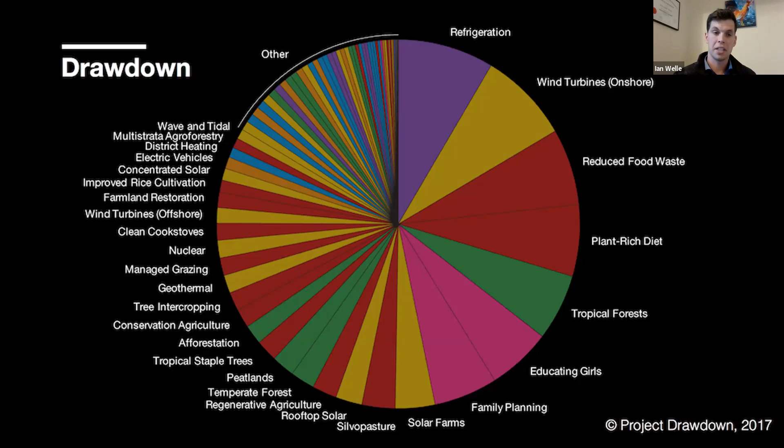So this is the single biggest thing that we can do to make a difference around the globe. It's bigger than nuclear, tropical forests, wind turbines, solar, for example. Things we talk about all the time that are having a huge effect on global warming. But the thing that we're using day in, day out to provide cooling to our curling clubs is actually one of the biggest culprits.

And so why is this though? This is a quick analysis that I put together to look at different types of refrigerants. Basically the culprit isn't actually doing heat recovery in your refrigeration systems. It's actually the chemicals that are inside your refrigeration systems. And ammonia is toxic, yes, but it actually has zero effect on the environment. So that's why a lot of people really like ammonia: it's the most energy efficient refrigerant and it's great for the environment as it has no negative effects on the environment.

But we have often used things that the industry in general calls freons, and when they're released into the environment, they have a huge negative effect. To put it in perspective, if you had a curling club full of R404A, and by a curling club full, I mean your refrigeration system in a curling club is probably around 200, maybe 300 pounds of refrigerant. If that gas escapes from your refrigeration system and is released into the atmosphere, it's equivalent to releasing 500 tons of CO2 into the atmosphere.

And to put that into perspective again, the entire natural gas emissions that a curling club produces in a year is probably around the 50-ton mark. So it's around maybe 8, maybe 9 curling clubs worth of fossil fuel emissions for the entire year. That just happens when you release that refrigerant into the atmosphere.

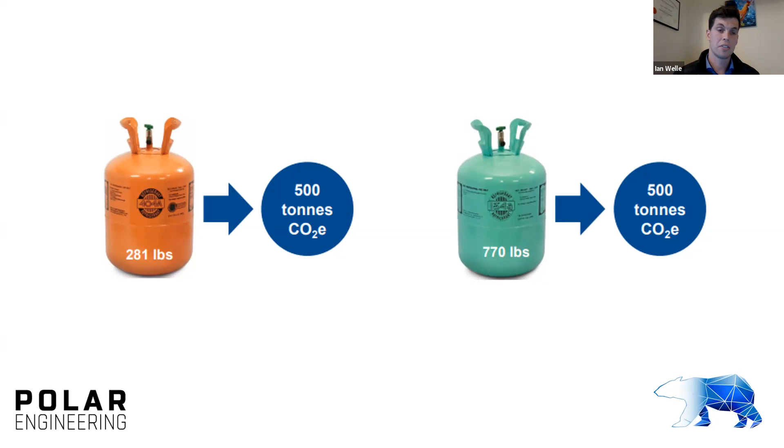And then if you look at another refrigerant, R134A, which is very commonly used in refrigeration systems that would come off the shelf from Trane or Carrier or those types of systems, if you release basically 2 curling clubs worth of refrigerant into the atmosphere, it's equivalent to releasing 500 tons of CO2. So it changes based on which type of refrigerant you use, but they all have a very large effect on the atmosphere. So what can we do about that as a world?

So what does that mean though for Canada? Because that's what affects you and me every day. So in Canada, we said that any refrigerant which has a global warming potential, also known as GWP, greater than 700, means that we will not be able to import that or produce it inside of Canada.

And so what that means for you is that if you're installing a refrigeration system today, it's really important to ask the contractor who's performing that work what refrigerant is going into the system and does it meet the new regulations. I don't expect you to remember all the facts and figures that I've been giving to you, but just to have that in the back of your mind that it's really important what refrigerant you pick, because after the year 2025, you will not be able to either import that or purchase that.

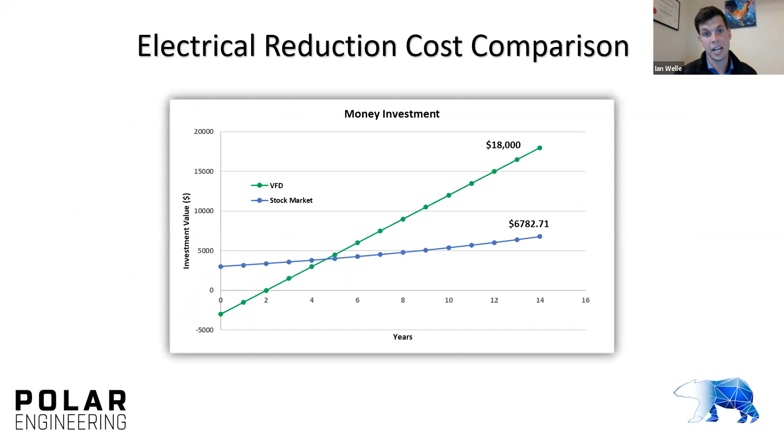So you pay for the project, and they will approve the project. So they'll guarantee you that they'll pay for that at the end of the project, but they want you to pay for it and then submit your tracking or bills that you work with either your contractor or your consulting firm. And then they'll reimburse you half of those costs about 2 to 3 months after you submit the bills. And that's true of the Clean BC grants and the VFD grants through BC Power Smart, that they don't pay for it up front, that they want you to offset the cost.

Oh, that's a really great piece of information for anyone to have with working on these projects. Obviously, we want to be able to access as many funds and help along the way as we can. So that's great. Okay, a few more have come in here.

On the energy savings front, I guess the question is, would you see some of these savings immediately, or some of these happening a year or 2 later? I know you touched on this a little bit throughout your presentation, but could you expand a little more if you're able to? Yeah, so where you see these savings is in your bills from BC Hydro and Fortis.

So basically, the second the VFD or the high temperature heat pump starts to operate is the second you stop using as much natural gas or electricity. So you wouldn't see the $1,500 savings for, this is the pumps, for example, VFD on the pumps. You wouldn't see that day one. You would see that accrued over a year, and every month your bill would be a few $100 less, sort of thing, if you incorporate it.

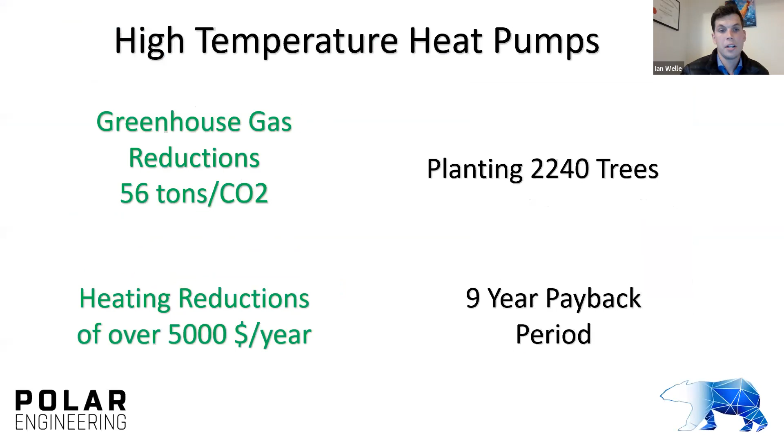The only risk or downside of installing a VFD is that if they fail, sometimes your brine pump will fail, and dirty power, or what we call brownouts, can sometimes hurt VFDs. But you can install them with what we call a bypass, which basically gets rid of that problem. Going back to the other question of why weren't they installed, they weren't installed because they cost more.

If you have two contractors bidding on your same job, one contractor could put VFDs on your system, but their number would look higher than the other contractor's. And so even though in the long run it makes sense, a lot of the time they weren't installed in the beginning, because they're a technology that's been on the market that cost a lot of money. They've dropped a lot in the last 5 years to become much more cost effective. So that's why they're getting installed now.

So I bet you if you built a new system now, it would get installed, but they were costly more than about 6 years ago. They were very expensive. And then on top of that, when contractors are bidding competitively for jobs, they're trying to remove as much cost as they possibly can. So this is a really simple way to reduce their cost, and it often ends up being an afterthought if you don't ask for it in the install. That's why they weren't installed. But they're generally really good options and good solutions to save you a lot of money.

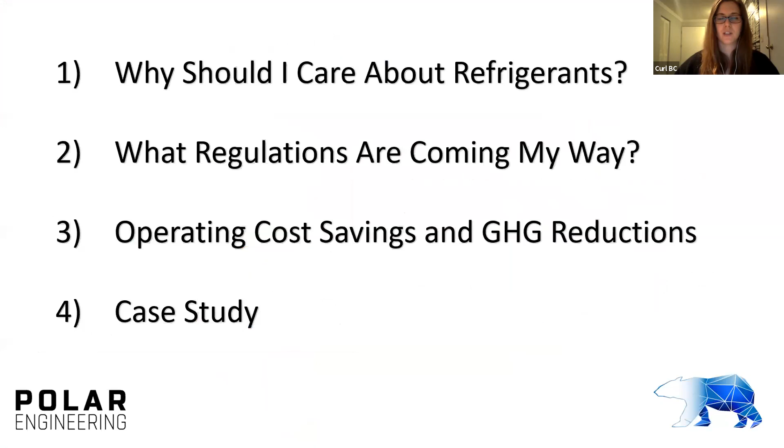Thank you for clarifying that. And it does highlight: ask the questions if you are in a process of bidding, of finding out what those numerical differences are and where they're coming from. Sounds like it's fairly important. Going to your manual a little bit more here, does your manual provide a framework for the costs to do the necessary work? So, in this year, task A would be between this amount of money spent. Does it go into that level?

I didn't detail that. If that was something that someone wanted me to look at, I could look at it for them if they wanted the manual updated. They're pretty normal tasks, so a lot of the time, I bet if you looked at your bills from contractors before, you could pull these things out, or you could talk to your contractor and say, this is the work I want you to complete this year. Can you please give me an estimate of how much it's going to cost? And they could help you with that. And it also depends on the expertise of the people operating your plants.

You'll notice there's certain jobs that we have identified work for the contractor to do that the arena owner could do themselves, but McKinsey decided that they would rather have the contractor do that work than the owner do it. And that was for safety reasons and the staff they had on site and just previous experience and really liking the contractor that they work with.

So there was lots of good reasons for making that choice, but I haven't broken that down in detail, and that's something that wouldn't be very difficult to do, but the scopes of work are clearly defined, so whoever you work with as a contractor could help you with that pretty easily. Awesome, thank you.

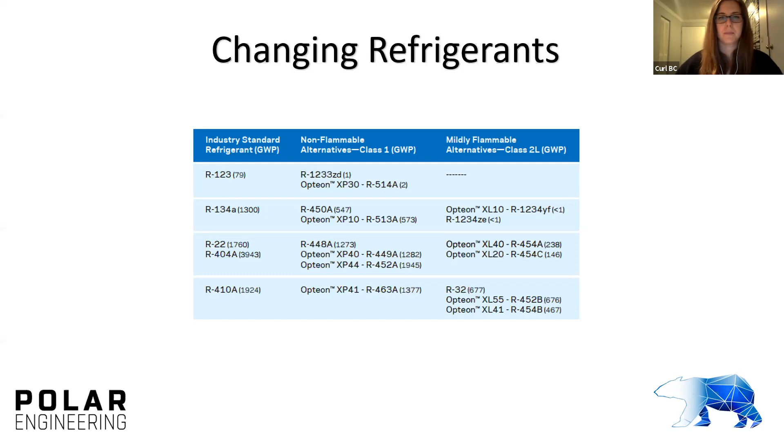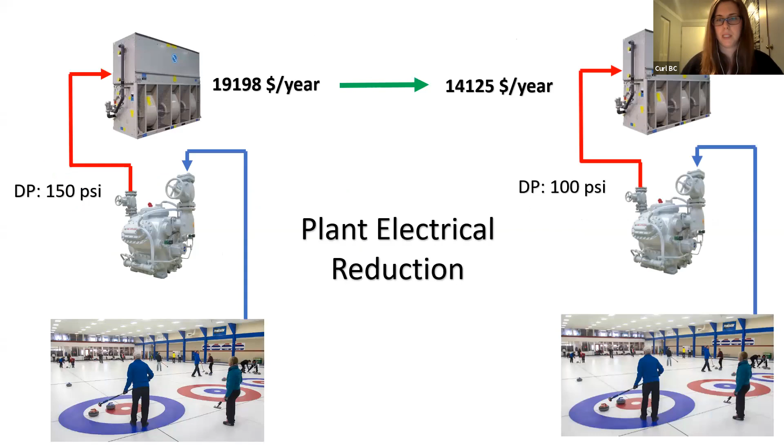Thank you for that. Going on the previous question that we answered about looking at the costs for task A, B, or C, we have a little more clarification. So if a board member is making these decisions at a club, how do they even know what is a reasonable cost for this mandatory work? And knowing which things are actually dictated by either the government or someone like Technical Safety BC or WorkSafe BC. Yeah. So you were talking about this manual again, right?

Basically, you can kind of think of it that you have to be a registered contractor to open a compressor, to change a valve. You can have ROs drain oils from systems if they're properly trained. This manual actually talks about what you can or can't do depending on your training level. That's one item in this document that outlines that in detail. And if you had more questions about that, I'd be happy to talk to it.

But it's also a conversation with your contractor, because if you're in a very remote community, you want to get everything done in maybe one or two visits a year, because it can be quite costly to get the contractor to come out and visit you. So what I would do is look at whether there are other facilities in your area that the contractor can visit at the same time to reduce their travel costs. But there isn't a specific thing in this manual that outlines the cost to perform that work.

But like I said, if that's something a board member wanted to get a better feel for, they could take it to the owner or a contractor they work with and say, can you please give me a price to perform the semi-annual maintenance? And is there anything in there you think I can do? They'll be happy to work with you on that, because like me, they're there to serve you and make your lives easier. And if they won't help you, I know all of them, so I can give them a call too.

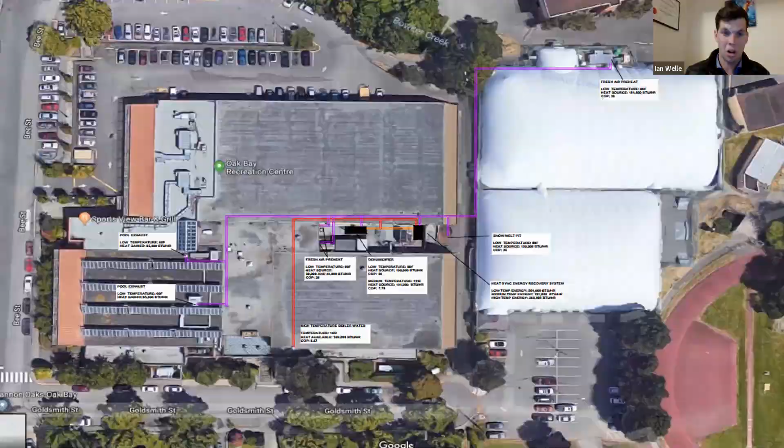Okay, we do have a question: are there any savings or grants out there for plants that still use oil as a fuel source? Fuel source, you mean like a boiler? They didn't specify, so I'm going to interpret that. Please ask another question if I'm off base. What Clean BC does, if you're using oil to produce hot water and things like that in your facility, we take the fuel source and calculate the amount of CO2 released by burning it. This 56 tons I've calculated here is based on using natural gas.

If you're using oil, that number goes up, because natural gas is actually one of the cleanest carbon-rich fuels to burn to produce heat or energy. So if you're using oil, you'd actually gain more money from the government than with natural gas. Propane is the same thing. If you're a community that uses propane for a lot of your heating, that number will go up and you'll be eligible for more money, because the CO2 you're not releasing every year will be more significant. Great, thank you for answering that.

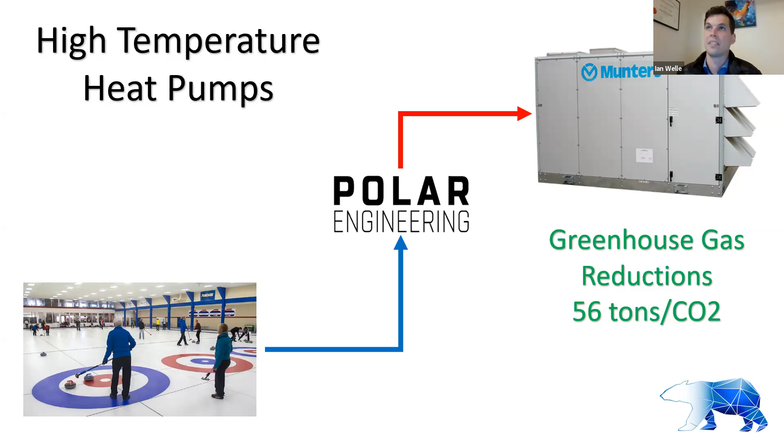Okay, we have a question: is a power factor correction capacitor worth investigating? Do you know what the payback time is? They've noted that demand charges are 20% of their electricity bills. Right. So your demand charge, I actually don't know if that feeds into your power factor. I'm sorry, I don't know the answer to that question. I'm more on the mechanical side. The VFDs are just a simple solution.

What you're basically doing is, if you have a lot of what we call inductive load in a system, and this is going back to university for me, so I'm sorry if the person who asked knows more about this than me, you very well might. Basically it changes the equivalent power that you're taking from the grid. So in short, I don't know the answer. I have friends that do, and if you email me, I can put you in contact with them.

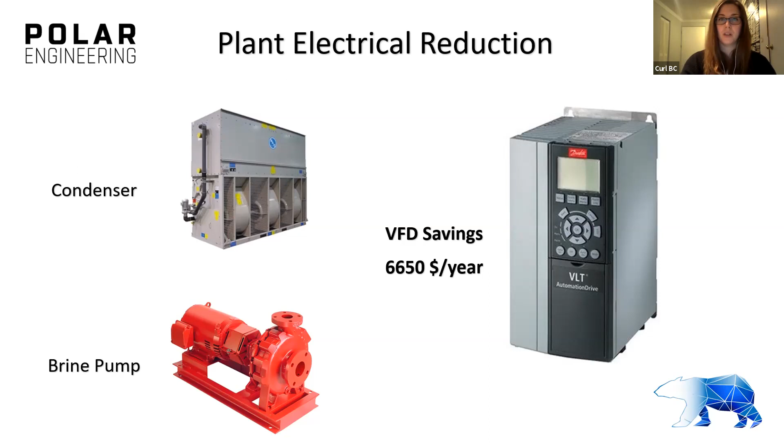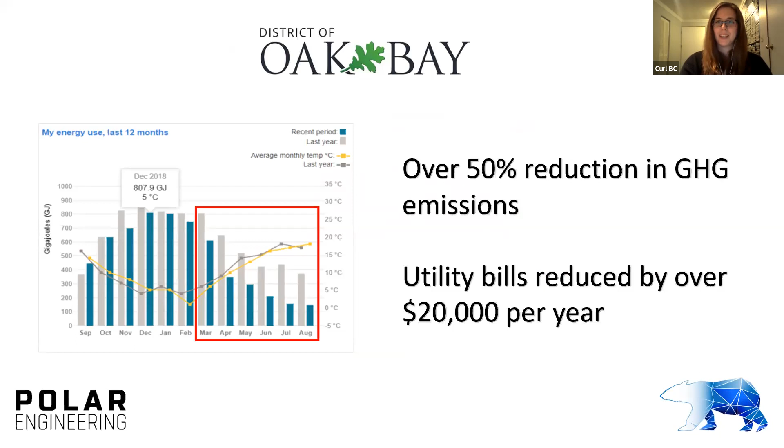Yeah, and thank you for answering that very tough question. Like you said, it's really going to depend on what your club's priorities are, where you are, and the resources around you as well. It could be a difference between an area having access to a lot of contractors and operators versus somewhere more remote, where your options might be limited. So those are things you'll have to take into consideration. And luckily we have people like Ian who can help with finding the best solution for our club.